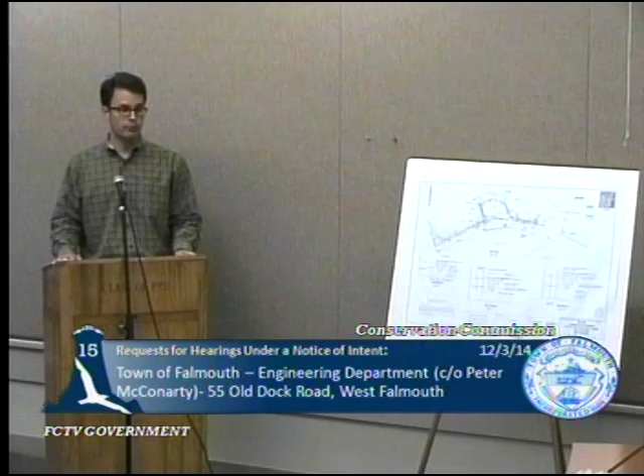Good evening, Chairman. My name is Trey Ruthven from Applied Coastal Research and Engineering, here on behalf of the town Department of Public Works. We're here for 55 Old Dock Road, which is the town wharf in West Falmouth. We're proposing to go out and repair the existing town wharf in kind. The handout I gave out is the same as what you'll find in the NOI — I just wanted to quickly point out the features of the site and walk through it. Here's the town wharf, which extends out into West Falmouth Harbor.

It was actually constructed originally about 1849. A lot of the walls still date back to that time, with some minor repairs. The stack wall starts here off to the west, extends along Old Dock Road, juts out into the harbor, back around, and then extends to the east towards the boat ramp. There's a wood dock facility on the northern face, which will also be repaired during the project.

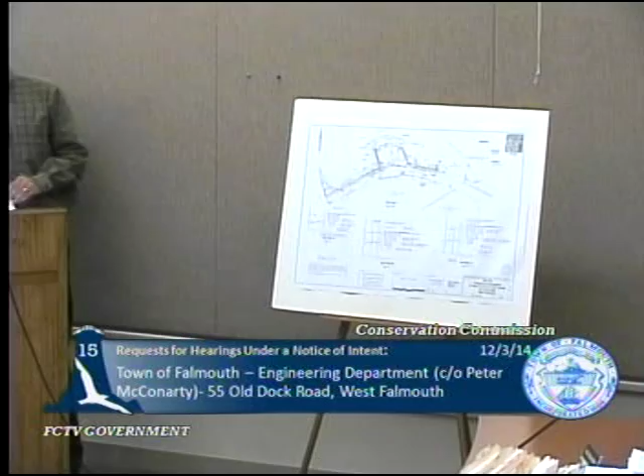I just wanted to quickly run through the condition of the structure. If you turn to the handouts, it's documenting some of the ongoing failures. The first photo shows the wall to the west, which actually fell over in the past year. The granite stones are now laying on the salt marsh. We're documenting some of these areas we need to repair.

The next photo, figure 2, documents the east of the wall, over by the boat ramp, which has begun to fail. We're also seeing failures in the wall under the wharf structure, shown in figures 4 and 3. Figures 5 and 6 document some of the voids.

The original wall was just stacked granite, meaning it was stacked on top with no concrete or anything like that. When the structure was constructed, geotextiles weren't in use back then. It was literally hand constructed, and slowly over time with the tidal action, the fines have been pulled out. Over the years, various repairs have been made—they've grouted between the stones, which concretes it up and stops material from coming out, but doesn't allow the stones to shift naturally.

Voids have formed on top, and they've been backfilled with various things—we found blacktop, concrete, and later granular fill material, just repaved over the top. Concrete caps have also been added along the outside of the wharf structure, not along the section by the road, but just along the wharf structure.

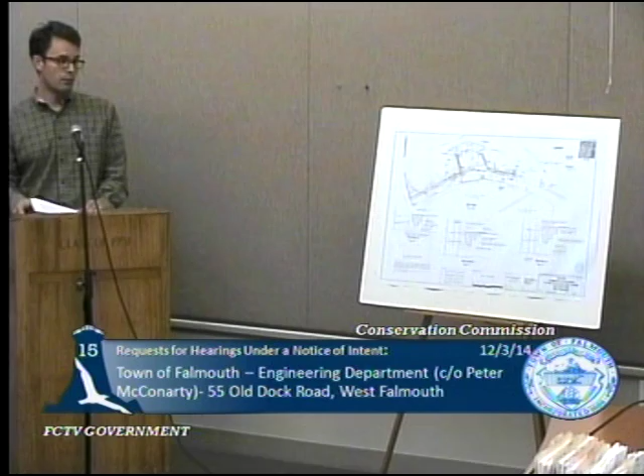We also had comments from Department of Marine Fisheries on that, and they just asked us the same thing, to make a condition that we don't actually put equipment on the salt marsh, just manpower, and limited to the extent practicable, not to dispose of any construction material on the salt marsh, and to restore the salt marsh when we're completed, which are all conditions we were fine with living with and plan to do anyways.

We also have land containing shellfish. The areas that we'll be disturbing are just at the base of the wall again. We don't anticipate any permanent impacts, and actually part of the project with upgrading the dock on the north face of this will actually help shellfish propagation within the town.

And the last bylaw which we fall under is the land subject to coastal storm flowage. The wharf is low-lying and actually doesn't really disturb coastal storm flowage during a storm. None of the repairs will actually alter that in any way, because we're building everything back to the existing grades and to the existing conditions, just with the new state of repair.

Any questions? I'm sure there will be.

Excellent. Thank you. Jen? Actually, I don't have any questions, Mr. Chairman. I met Peter and Trey out in the field, and we discussed all my concerns then.

Okay. Mary? I guess I'd like to hear a little more about the activity on the salt marsh, such as how many people are going to be involved in that work, and roughly how long is it going to take?

What we're proposing as we deconstruct this wall is to do it in sections, because we'll be working around the tide being high and low. So we've actually had a couple contractors out to the site to kind of talk about how they go about this and different methodologies for doing this. Likely we would be taking like a 10 to 15 foot section at a time, deconstructing at low tide all the way down to the foundation and stacking back up.

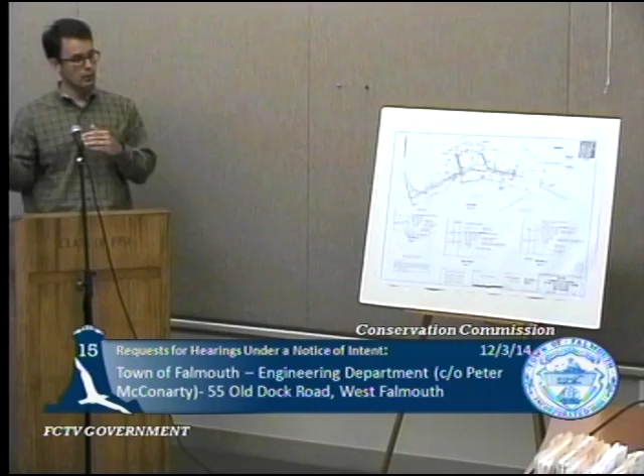So really, their job is literally just to help place these stones and then chink back in. They'll be progressing, but we'll probably have 2 or 3 sections going at a time, one being higher where they can work at high tides, where there's backfilling and compacting and putting the geotextile material behind, and then lower sections, so as the tide comes down throughout the day, they can do the foundation area. So they'll keep marching around along the outside of it.

Obviously, we'll plan to do the northern side, which would not be affecting the salt marsh, but around the dock, probably around spring tides, so we get the lowest tides, so we can actually get down to the foundation under generally dry conditions.

Working time, I'm anticipating this project will probably run 3 to 4 months. It'll be a fairly long project working on the tides, and they'll also be doing it in the wintertime. I'd imagine start to finish, it'd probably be about a 3 to 4 month process.

The salt marsh is going to be affected that whole time, pretty much. It will be - there'll be foot traffic on top, which is why we're proposing to go back and replant after the process is done. So yes, I am anticipating a temporary impact, but I do anticipate to come back.

I think you said something about restoring the substrate - exactly. There were a couple of different ideas. One was to actually excavate the salt marsh substrate, which I didn't think was a positive idea, take it off-site and then bring it back, which wasn't really practical or sustainable in the long term. So the idea is, if we somehow damage the substrate, to actually bring back in peat, try to level it off as much as practical, and then replant on top of that, just to make sure the salt marsh plants, when we put them back in, have positive footing going forward.

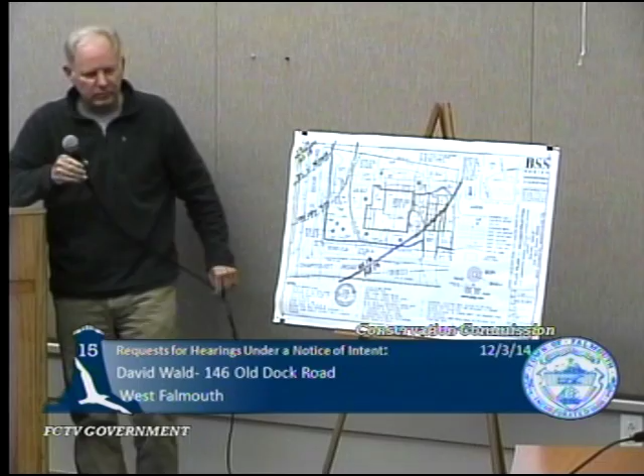Thank you, Jeff. Good evening, I'm Jeff Ryder with BSS Design, representing David Wald, who's going to build this project here in West Falmouth. This is at 146 Old Dock Road at the intersection of Chapoquoit Road and Old Dock. This is an old dwelling here, it dates quite a while back. It's a cottage-style home, and it is in need of repair.

Its first floor is at elevation 11.65, which, you can see, we're in an AE18 flood zone, so it's several feet below the 100-year storm flood level. So looking into trying to renovate that, it just turns into a substantial improvement requiring lifting of the house, and that house just wouldn't work with lifting it up 9 feet. So we propose to reconstruct more or less on the same footprint, moving a little closer to the road, generating a little more yard on this side.

The main part of the house is where the existing house is, with a deck and a porch. You can see the elevation of the first floor is at 19. This is by code - 1 foot over the elevation 18 required in your regulations. That's the first floor.

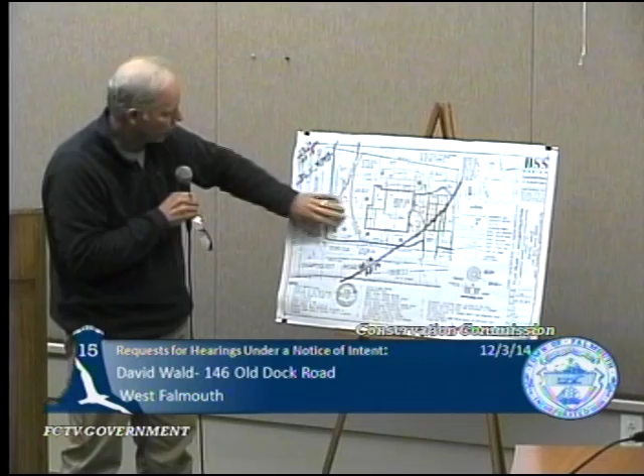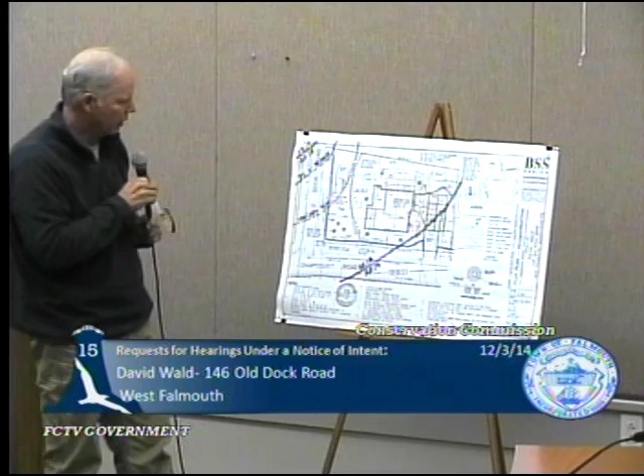In the proposal, we also have a series of dry wells for the roof runoff. And then we're held here by the limit of work - I say excavation in parentheses, meaning there's no earthwork occurring here except for some wall repair work. You'll see in a couple of spots in the plan, we show the wall to be cleared of all the brush and suckers growing up through it, and sort of restacked. Some areas are falling down - it's been several years since that's been repaired.

So those are the main items: reconstruction of the house, gravel driveway, septic, repair the wall. And one last thing that's important to you, I'm sure - there is an English holly here, and the reason we're proposing to take it out is for the view. We're proposing to bring 3 cedar trees into this corner.

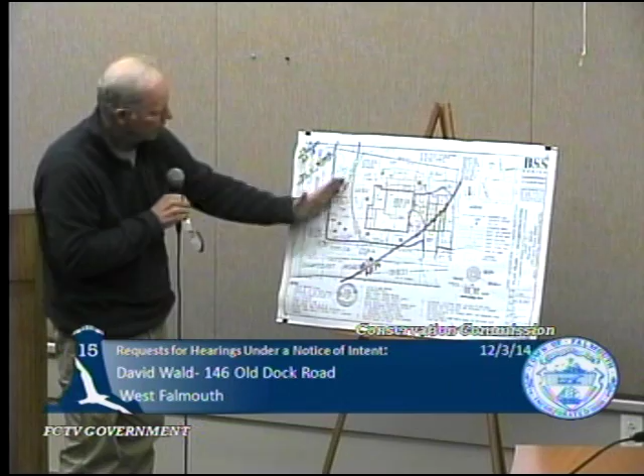That is just within the limits of the salt marsh 100-foot buffer. Now the marsh is over across the street - you know the Sylvie job pretty well, I'm sure. That's the salt marsh we offset, and that's the line of 100 feet from that marsh. Again, going back to the flood zone, we have a velocity zone here with a 25-foot setback, barely coming onto the lot.

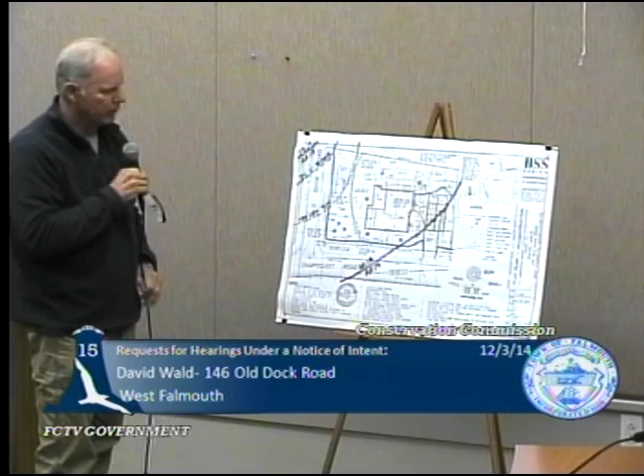That transitions into the AE 15, and then that goes over towards the bike path, the flood zone. So the whole lot is in the flood zone, and that's why we're here. So any questions? Thank you, Jeff.

Jen? Yes, Mr. Chairman. So you're removing all of the vegetation along that wall, and you're not proposing to put any of it back? No, the wall has - if you've looked at it, we're not taking the trees that are on the wall. That's all staying. It's just clearing the brush that's growing up through the wall, causing it to tumble. There's a lot of root growth, basically all of the brush along the wall, Jeff. You're probably gonna get rid of it all, correct?

I'm not sure you're making it out to - you know, we're not being sinister to tear everything out. I'm just saying that you're calling it brush, and Mark Kaspers is calling it excellent wildlife habitat.

Whatever is removed will need to be replaced because it's within the 100-foot buffer to the salt marsh. So I'd like to see that on the plan. Find out exactly what they want to remove, how they're going to do it, and how much they're going to remove, and compensate for it. And mitigate for it.

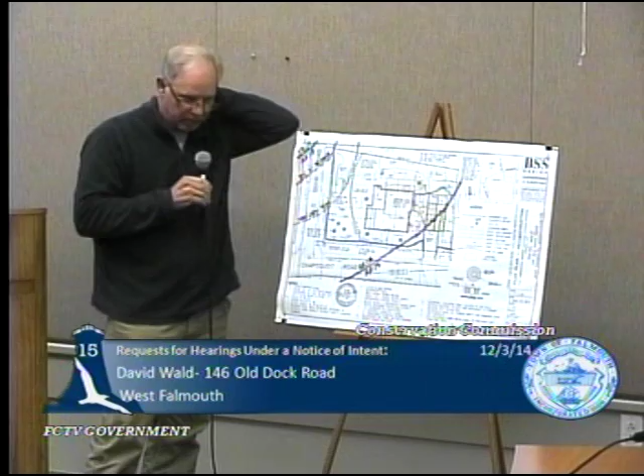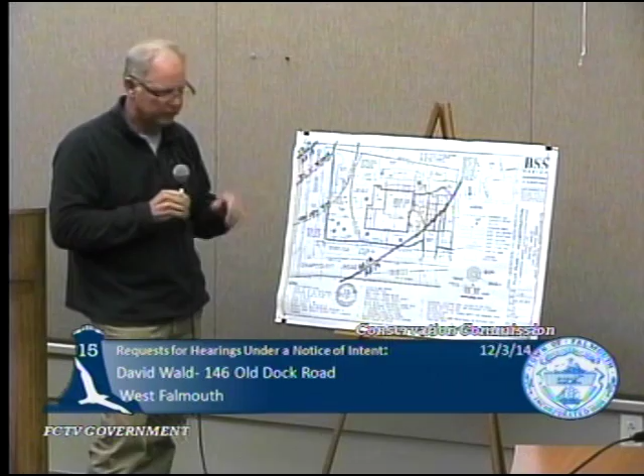Same thing here. And Jack, if I can correct it - one moment please. And I appreciate you referencing that, and there's also restoration that's going to be done on some of that area as well. So be mindful that - promote your project please. Don't try to - I'm going to take exception to trying to twist other things, all right?

You have a project that's very promotable, but it's a harmless little project. It's just fixing up a wall that needs to have some brush taken. And that's where I want you to go with it, Jeff, okay?

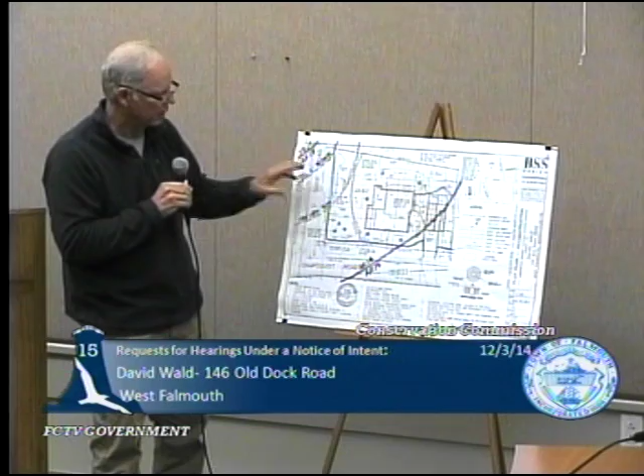Could you please pass those down? All I'm saying is, it just says stone wall to be cleared. It doesn't mean 3 feet on either side to go through and strip it down of everything. It's just harmless - I'm asking, Jeff, to repair, and possibly have the board consider mitigating whatever shrubs are taken out that's causing the wall to fall. I'm not saying don't repair it.

And you're probably not gonna like this statement, but the holly tree - your regs say that holly trees and beech trees should not be removed. So that is gonna be a discretion up to the board. But in section 10-18-9-11, it says red cedar trees may be removed, but that American hollies and beeches should not. So that does give you the discretion on whether or not to allow the holly to be removed and replaced with red cedar. Those are my only comments.

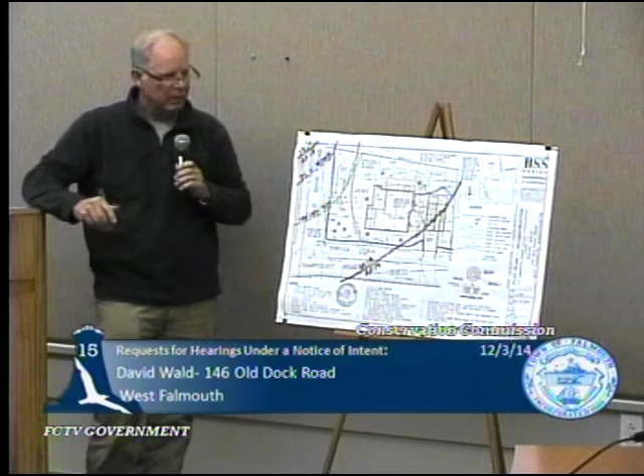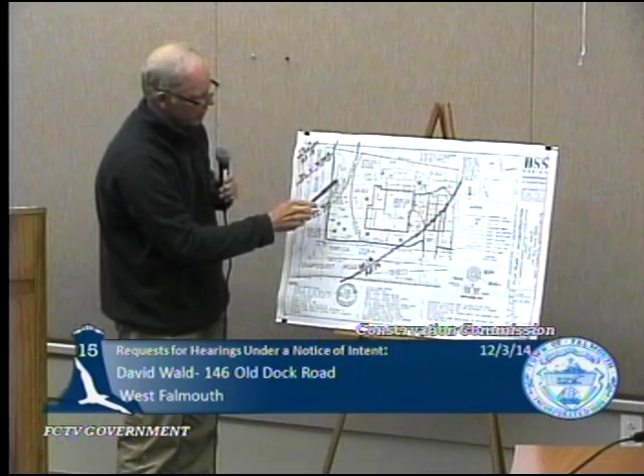Other than that, I have no issues with the project. Can I just make one more comment, please? I did have Grafton Briggs out at the site, and over here there is an American holly, very hardy, nice tall tree. This one is a little more wispy - well, I'll say it's an English holly. It's probably a little bit out of place, but it was planted there once. So that's why we're proposing to remove that one and not, of course, touch that one.

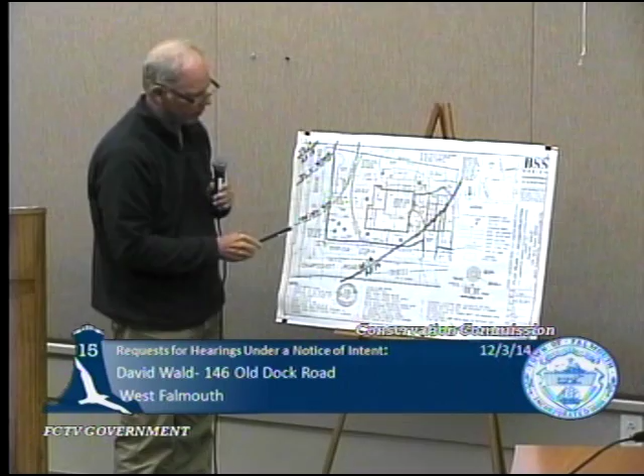Thank you, Jeff. Thank you. All right, we'll open it up, John. I don't know if this really has to do with anything, but I'm kind of interested in the septic system and how that works. I've never seen that before. Can you talk a little bit about that? The septic system you're proposing to put in there?

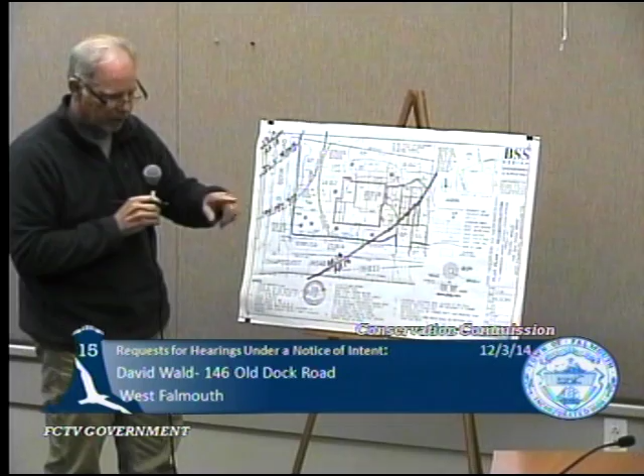It's very standard, really. These are a field of infiltrators. They're a plastic unit, H20 rated, meaning you can drive over them with a bigger vehicle. The septic tank is here, a standard 1,500-gallon tank with a pipe entering here, exiting here to the D-box. The D-box distributes it to the field. And they're shallow - on your second page we'll show the low-profile setup with the correct distance to groundwater. That 5-foot distance on this end, they need a minimum of 4 foot. So that's why they were created - they grew horizontally as opposed to vertically back in the day. That's neat, it's new to me, so thank you.

Is that it? Yeah. Okay, Mike?

It's totally outside my jurisdiction here, but there is some granite support for that existing house in the corner, on the northeast corner. If that existing house is gonna be used, the town could surely use that pink granite for the dock down there. Well, I can't say I'm happy with my question, but I saw more pink granite today than I've seen in a long time, so I just figured it's meant to be.

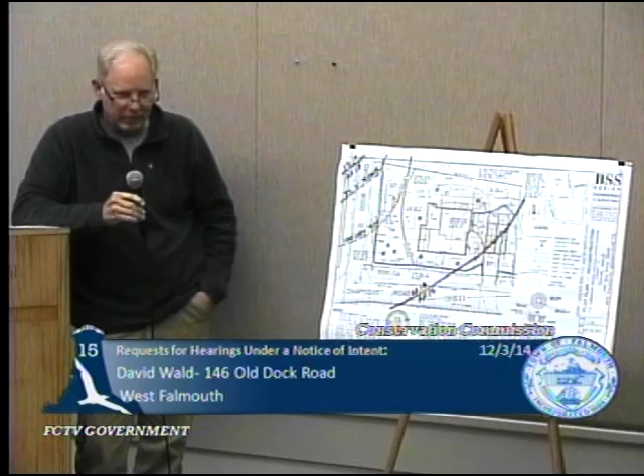You're right, it is on posts, and some of them are concrete and some of them pink granite. I don't know if it's the right gauge. I'm just bringing it up, no obligations on my part.

Okay, no other questions? Russ? Jeff, could you give me a little of the methodology on exactly how you're gonna repair the wall? How would that work? Are you gonna take the stone out and cut all the brush? This is the areas where I saw vegetation that has grown up and pushed the wall over in spots, so we want to fix that. So it's random, you're not doing the whole wall, just sections? Just fixing the wall that's come down, and maybe get some of it at the top where it's loose, kind of just get it into better shape. We're not going to tear it down and put it back.

It's a touch-up, basically. So are you just taking out vegetation where you need to move those stones, is that all it is? Right, right. I mean, a lot of it's just suckers that have come up through the wall, so it's not like clear cut and start over again, just using the same stuff.

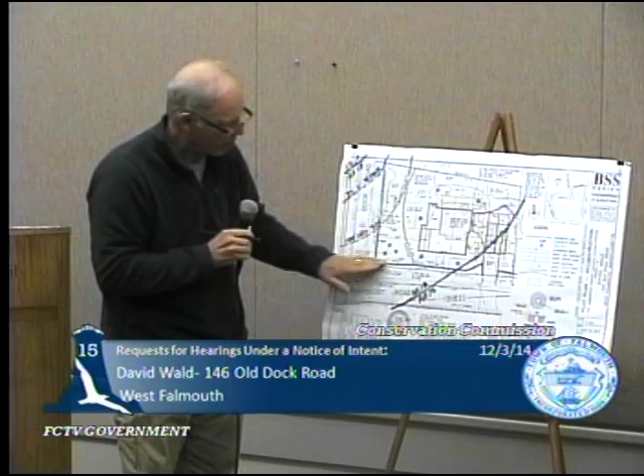Right, just repair as necessary. And it looks like there's just two spots that you pointed to, is there just two spots on the wall that need to be repaired? Well, no, that was just saying it's both legs, we just want to go down the whole thing and tidy it up. It's just a little confusing, I guess.

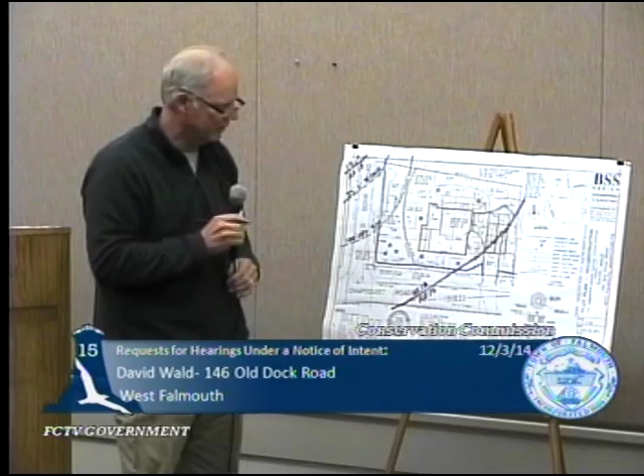Okay, and we'll come back to that in a moment. I mean, I'm not looking to tear it down to the ground, it's just... and I want to let some of the board members speak. I guess it's the way it's written, Jeff, you know what I mean? It's vague, it says stone wall to be cleared and repaired.

Maybe it should have said cleared of brush, because when I first looked at it, I said, well, we could condition that and throttle it back if you think that's too aggressive sounding. But I mean, there's some natural stuff, and I agreed with what Mark looked at. When I looked at it, I was like, geez, I hate to see it all get chopped out of there, just like I hate to see that 12-inch holly go.

That's what I'm saying, mitigate for the brush that's being removed. Put back some wildlife habitat value to the lot that you're removing from, that's all. That's fine.

One moment, before I open up to that, I'd like to poll the board, get this all out there so that if there's more information you want to provide, you'd be able to do it all at once. Okay, I'm good, Mr. Chairman, thank you. Okay, thank you, Jeff. Mary?

I just have two little things. Just to clarify the discussion that was just had, that note about stone wall to be cleared, you do mean that to say cleared of brush? I mean, that's, okay, yes. All right, and then the only other thing...

Is in section 4 of your narrative, you talk about the areas of proposed work included in the flood zone. The last item says remove the limit of work and install voluntary native shrubs. Is that really the 3 cedars? Oh, that should be, yeah, you mean the 3 cedars, or is there another plan for shrubs? That probably meant to say that, so, well, then maybe it will be required, not voluntary, but required native shrubs. Okay, thank you, that's all.

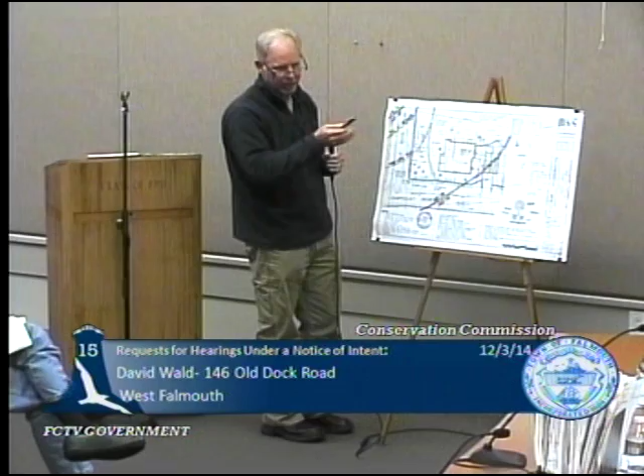So it does go up 1 foot over, and if you look at the ground elevation, you've got 9 and 18 - just by the fact that you have that separation, it creates a whole floor out of the ground, so they're gonna have storage in the garage underneath, and then the story and a half above.

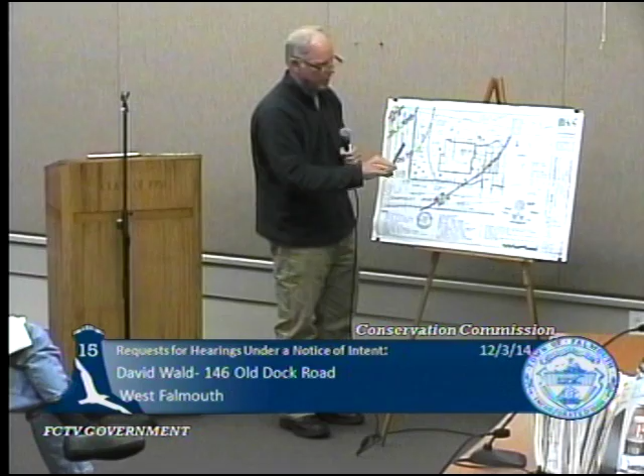No bathroom on the first floor? You can't have any habitable space that's down like that. You can have an entry area in an A zone by code and by what the building department allows, but there can't be any large finished areas in the lower level - by finished floors, we include bathrooms. So no bathrooms, just mechanical space, because this isn't going to have outlets connected down low, it's going to be connected to a septic system, and in theory the septic system goes under.

Right, well okay, I'm happy, don't have to worry about it then, it won't be there. It's been thought of, that's fine. Yes.

Are there any further questions on the board? At this point, I'll open up to the audience. Is there any discussion anybody wants in the audience? Please come up and identify yourself for the record.

Hello, I'm David Wald, I'm the builder, and I'm building this to sell. As far as the stone wall, I want to do what's best for West Falmouth and the environment. It's the right thing to do for the house I'm putting there - it's what I assume the buyer would want. So there's no real bad issue, we just have to figure out through staff what you'd like.

There's a lot of big trees not intended to come down. With my little knowledge of it, it just said it'd be nice to show the stone wall, maybe clean it up some - there was no real specifics. But we could just find out what works best, and that's a done deal. The holly - I think in that regulation, they weren't referring to an English holly.

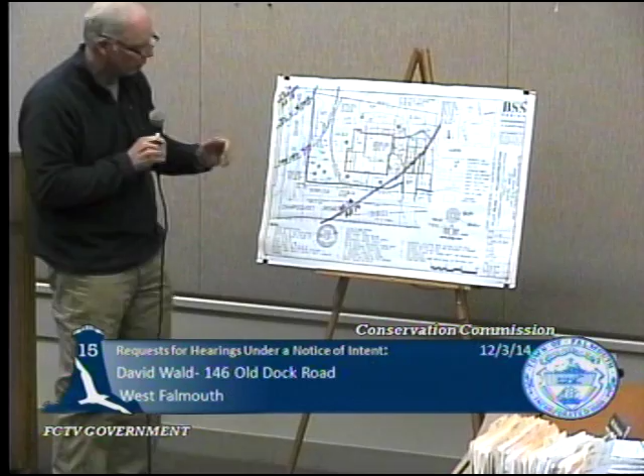Again, if you're here, there is room to have somebody on the outside and not be in the town layout, or just up to it. So there's a couple feet here, maybe even 3 feet on this side. And that activity — I don't think you're meeting opposition of that activity. It's just that because it's on the town layout, some acknowledgement is needed.

I mean, we just really want to show off a nice historic wall. Yes, you do, you mentioned it earlier. Oh, God, there's a wall there, you know?

And I just need, because it's not your land, I'll put it that way, it's not your land, now you need to talk, and that's how it's gonna be. I'm gonna tell you that now you need to go to the town and get a letter acknowledging the activities on that property.

That's as simple as it's gonna get. I can try gift bows and all that and try to be delicate about it, but if I have to be real black and white, I'm in the mood this week to be real black and white.

So, take away, are we gonna need to have a continuance for the changes that are gonna happen in this plan? Because if the tree goes, he's gonna have to have more mitigation than just the 3 cedars.

Then yes, we will need to, and maybe it would be helpful if I met them on site. They could show me exactly where they need to do the repair, and we can kind of help them along on what might have to be replaced.

And then that way you can talk to Peter and get a letter as well. Okay, and I don't mean to slow a project down, because the steps that we're taking now, as Maury had said, was when you go for your compliance elevation. When you don't get this muddied up now, and you go to get your compliance, it's gonna be a breeze, all right? Sounds like we're all on the same page.

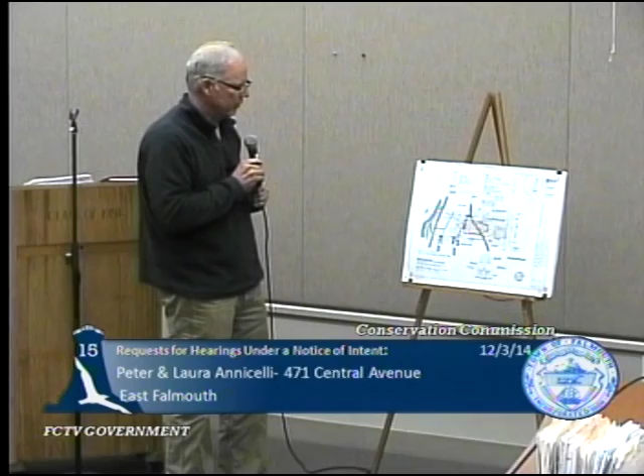For the record, Jeff Ryder with BSS Design. This project may look familiar to some of you because one year ago, you voted an order of conditions for complete renovation of this house. It was going to get some additions, some porches, also a new roof and windows. It was going to be a substantial improvement. But at that time, it was above the flood zone.

So we had an order of conditions, a building permit to go ahead, and then Peter Annicelli thought, well, listen, I'm going to put a lot of money into this, he wants to come and live here. And then I'll have a house in the flood zone because the new flood maps came out last summer. The datum went down, the flood zone came up, and lo and behold, the floor is now a few feet below the flood elevation. So why would one do all this work and then have to pay flood insurance, or a high premium, on their house?

So what he wants to do here is raze, as in demolish, and rebuild on the same footprint. This side here to the south is a little bit further than the existing wall. There's a wraparound porch, and the reason for that is to bring the construction down to the ground, through slats and nice construction work around this porch, to mask the foundation in the narrowness of the building. So I think you can appreciate trying to blend the house back into the ground when you have to elevate it, not a full story, but a partial story.

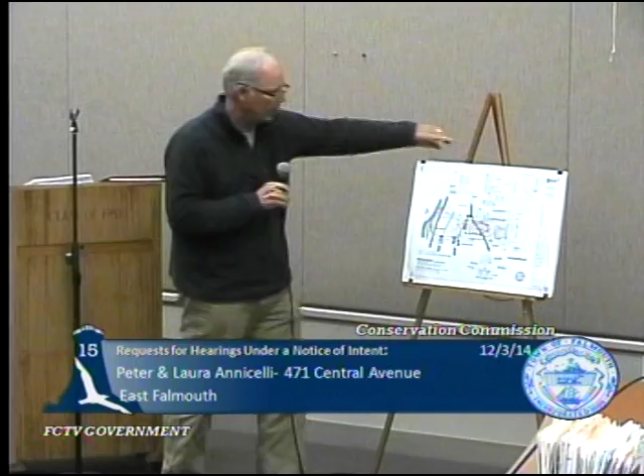So if you looked at the second page, it's a septic thing, but it gives you an idea of what we're having to do. We're putting a slab at grade in what they're going to call a crawl space, but it's really a slab at grade, with a first floor at 14. So that gives you the construction idea there, of getting it out of the ground. It'll also have flood vents in those walls.

I'm going to go back to the resource areas. We've got land under the salt pond, salt marsh. The limit to the salt marsh is a coastal bank, about a foot or so high, that's staked in the field. And then we're in land subject to coastal storm flowage, and that goes, there's a transition here. You see this pink line on my plan, and another one here. This is where elevation 12 and 13 are, and then the remainder of the lot is in elevation 12 in the AE zone.

So no work to the small cottage in the front. That in fact was renovated about 2 years ago. So the Annicellis are new owners as of a couple of years ago. Again, they wanted to keep the old house, but it just wasn't going to work out for them. Limit of work stayed the same as last time you saw this.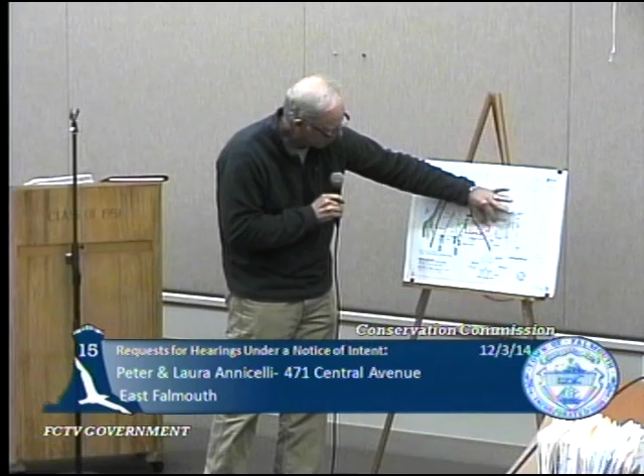So that's about it. Oh, no, there's a new septic proposed here. It's kind of linear because of the narrowness of the lot, so we're keeping the existing septic tank. You'll see there's a short little field here today. Again, we're using the infiltrator strip here and the distribution box in the center of that strip. Drywell detail, of course, and we have a few dry wells around the house.

And I'll take any questions. I'm going to interject before anybody else — thank you for bringing up the drywell detail, because on your last plan it wasn't on. It actually was, if you got the revision, the last one does have it on there. I stand corrected, thank you Jeff. It's right in my face, right there. Thank you so much, appreciate that. So, Jen, any questions? Jeff, you're moving closer than the present primary structure in the salt marsh buffer zone, correct?

Primary structure? Yes, your present primary structure, not the gravel area, the structure itself. Yeah, the stairs coming off of the porch. So now your new wraparound porch extends further into that zone A at the salt marsh? We have this little corner here. Even right there.

There is a disturbed area that was very similar to the last time. This is where we were. Here's the last plan, Jeff. We're doing some modification right here. So what the board allowed you to do is build the proposed porch, and you just wanted that little corner last time, and it was a disturbed area, so the board said okay. Now it's two little corners, so the board will have to decide whether or not they want to allow that. But I can show the board the difference between the two plans.

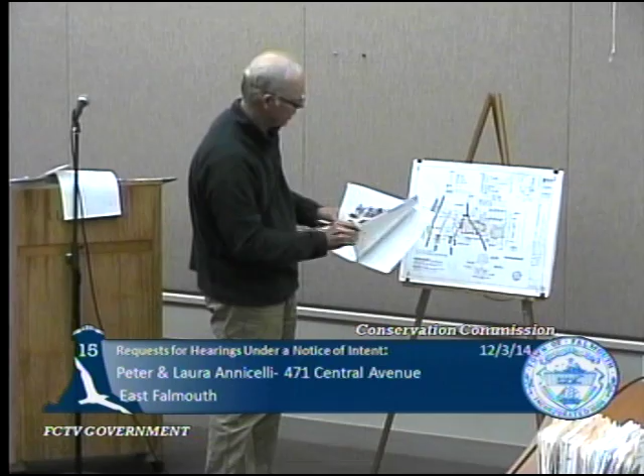So when you look at this, this is a set of our preliminary architecture that's gone to the zoning board of appeals, which is required. And here's a perspective taken from this view here, maybe even across the waterway, looking at the water, the final product, the view towards the water, or from the water.

It'll explain the reason why we're putting the wraparound porch, and you'll see that it kind of carries the house to the ground. That makes sense, the two corners, I think.

You're putting an awful lot into those trees, so what's the methodology, the timeline of the project? You're coming in, you raise the house, you're going to move the trees, and then start the foundation and do stuff, because I don't see you moving those trees with the house there, or after you put the new foundation in.

I think they could still get in there, that driveway's pretty wide. Okay, well, they wouldn't put that porch on right away, of course. Now the foundation's gonna go in, obviously.

Okay, I just want to know, because that's going to be a coordination issue. I've seen Dale tree movers and some of their work, I've literally seen them crane equipment and trees over houses. I know that they're capable of taking and transplanting these trees.

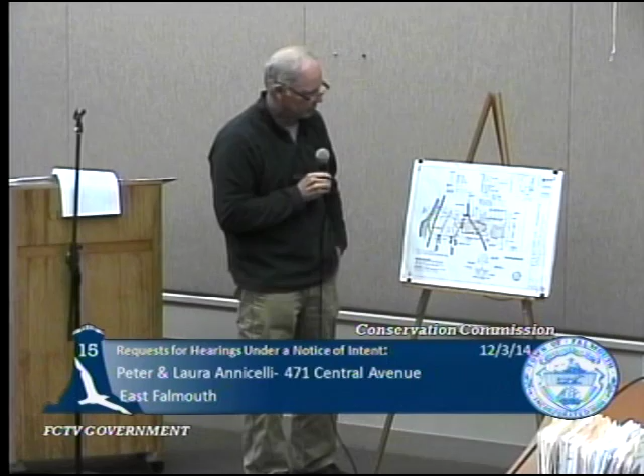But if they did pour the foundation, I think they could still get at it. I'll give you that, but there's more activity around those trees after the fact. Now, you gotta understand, I say this with the greatest empathy and gratitude for every knucklehead that's ever framed a house, okay, including myself. Those trees are in an area where there's gonna be huge amounts of activity.

They're gonna end up having to have a safeguard around them. There's gonna have to be some kind of, not just stakes in the ground, but some type of fencing with metal posts that scratch paint. Because that's what's gonna happen.

You're gonna have, it's a linear driveway, and you have a lot of activity. You got lumber dock there, you got the sound and vision guy, and everybody, we gotta get this done, because oh my goodness, we got an inspection coming. And next thing you know, somebody's a knucklehead and backs into them, or drives over them, or you got a forklift, or a lull, and the tires crush the root system.

It happens. Even with the best intentions, you want to make sure that you protect that. I guess that's what I'm getting at, because it's more costly after the fact. If these trees don't survive, you're even more constricted to try to replicate what's there. And that would be what would happen.

If these don't survive, my idea of 2 trees probably won't happen. There will probably be 6 trees somewhere else on the lot. So there's an incentive to make sure that the knuckleheads, including myself, don't back into these things, don't put lumber on them, don't have the trash container there.

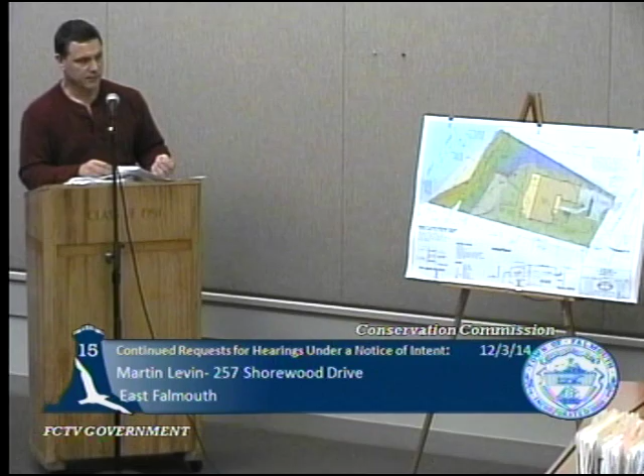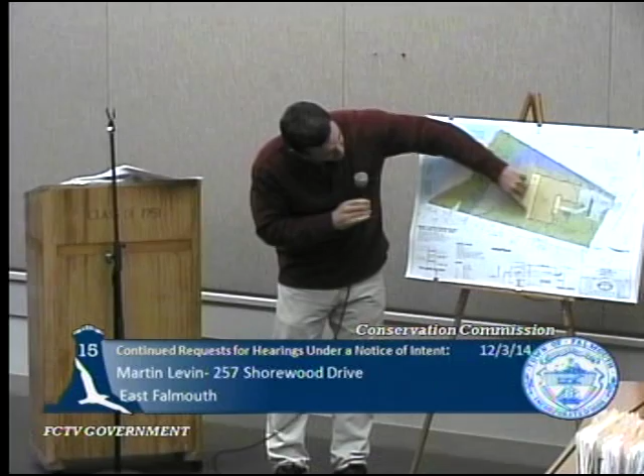We found out from the owner where it's located, and it's shown on the revised plan, dated November 24th, 2014, noting the existing septic system. The septic tank is in this location and the leaching system is on the side here. It's substandard anyway, and also in conflict with the new house, so it will be revised and reconstructed as a new Title V system on the landward side of the house, between the house and the road - further away and basically outside jurisdiction. That's the only change we made, and I'll turn it over to Katrine.

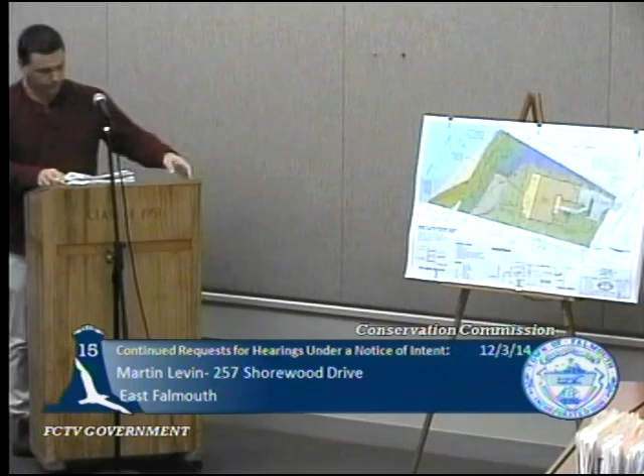Hello, for the record, Katrine Higgins from Wilkinson Ecological Design. I believe there were no clarifications needed or changes on our plan, so we didn't revise anything. I'm happy to answer any questions.

It was brought up the issue about the 6 previously managed black cherry saplings proposed for removal, maintained at 6 feet in height. There may be some revisions in the order because they weren't previously managed properly - they were illegally pruned to that height. So if they are removed, are you putting anything back in those areas? We have chokeberry and serviceberry right there. We just thought it would allow more light.

No, I understand, I just wanted to get them out there with you. That was my only comment on your plan for this property. That's right, yeah.

Is there any further questions from the board? Is there anyone in the audience that would like to comment on this project? Seeing none, I'd entertain a motion.